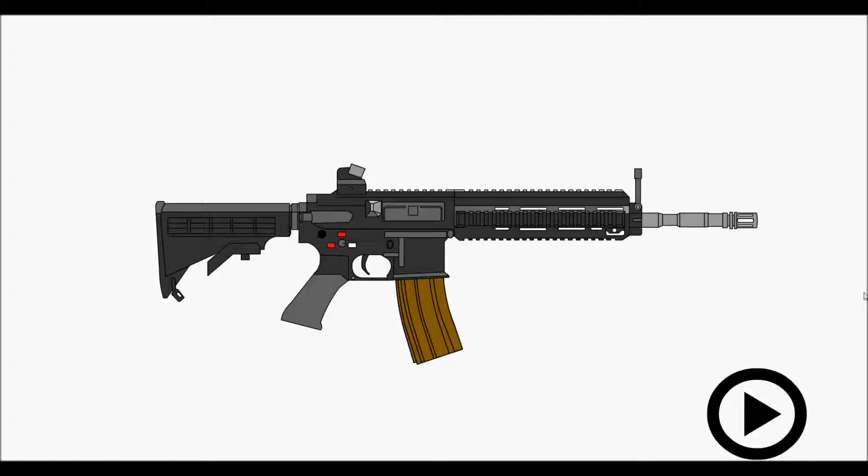It's more stable, and I'll tell you why. In the beginning, I'll use this GBB to demonstrate it. The GBB is called the Gas Blowback Airsoft Rifle.

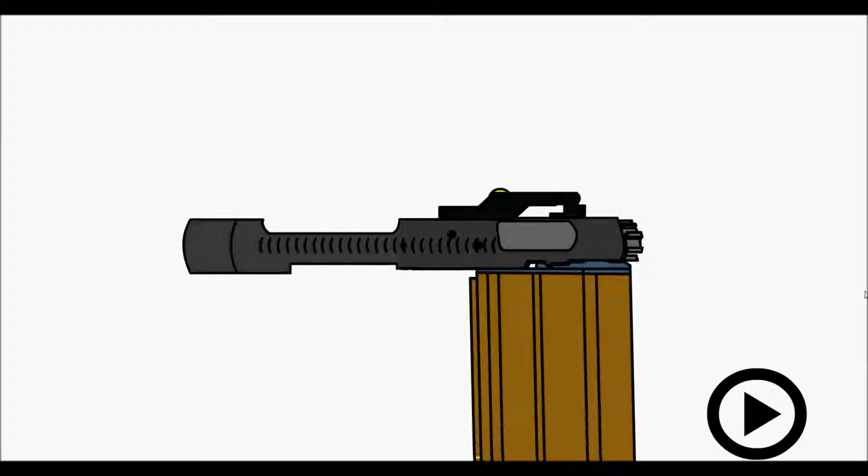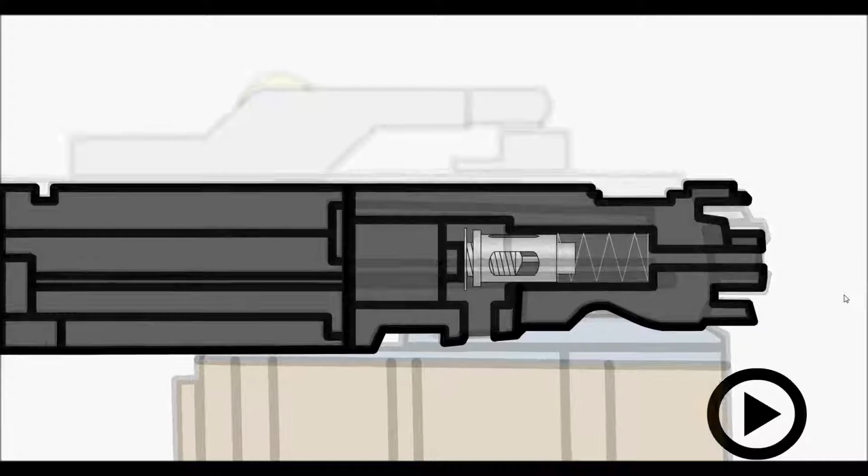It was powered by propane and shoots 6mm BB bullets. We remove the upper receiver and lower receiver and cut the bolt carrier inside the nozzle. You can see the NPAS inside this nozzle, and there are actually three parts inside: the cylinder, the disc, and the spring.

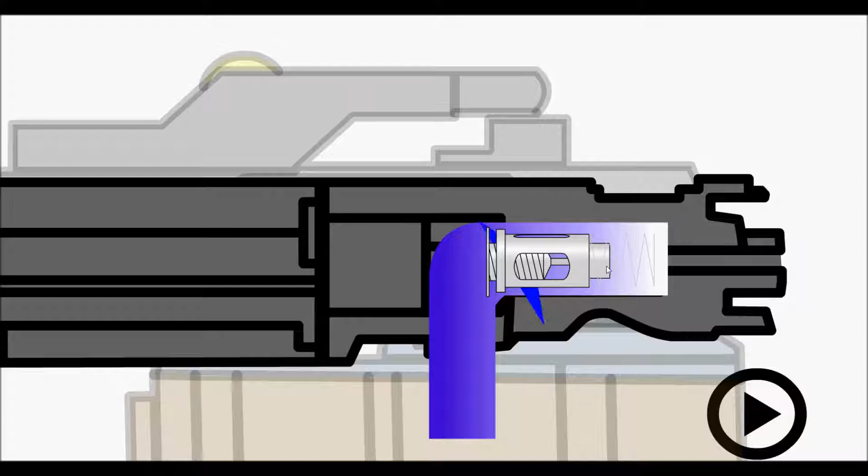When you fire the BB bullet, the gas will come out from the magazine and use it to propel the BB bullet. Meanwhile, it will push the whole cylinder moving forward until the cylinder stops the way, so the gas can't move forward anymore. Instead, it will turn into the other direction and push the whole bolt carrier to the rear.

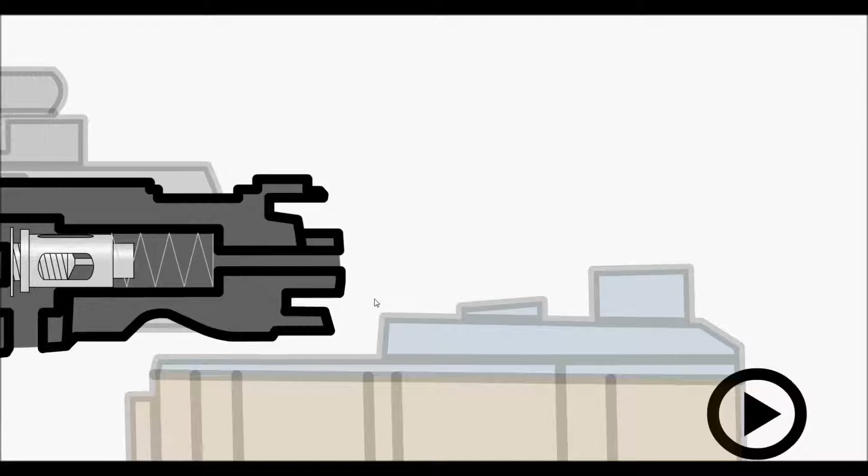Then the bolt carrier will engage with the disconnector inside the lower receiver, so the gas will be stopped. Then it will cock the hammer again and come back, ready to fire the next round. The NPAS is able to change the length, so it can stop the propane earlier and the FPS will drop.

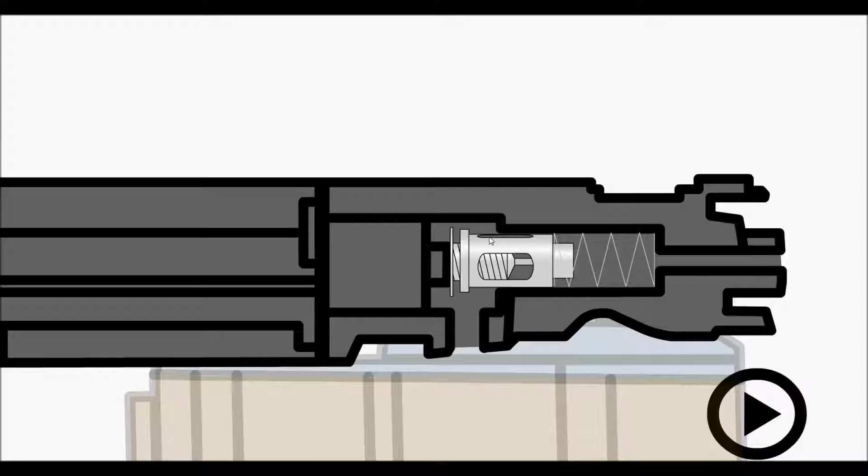But after many years, and from some customers' feedback, we found out that the cylinder will actually change location when they fire a lot of rounds. So the FPS will change.

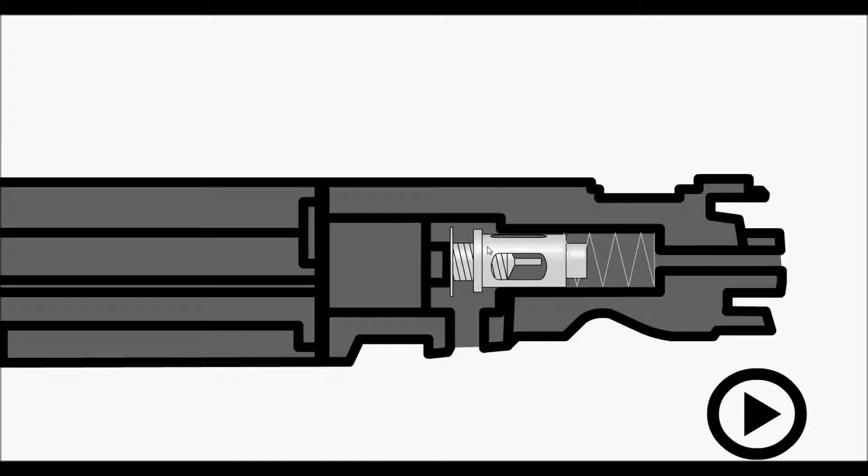We wanted to solve this problem, so we thought a lot and used many ways to find out the reason. The result is we wanted to solve the problem, so we changed the design inside this nozzle, and also used a different way for the nozzle head.

This means if we can make sure the whole internal parts are always in the same location, the FPS will be the same. As for the front end nozzle, if we can restrict or limit it, the FPS will also be more stable. Now I'll tell you how Artec did it.

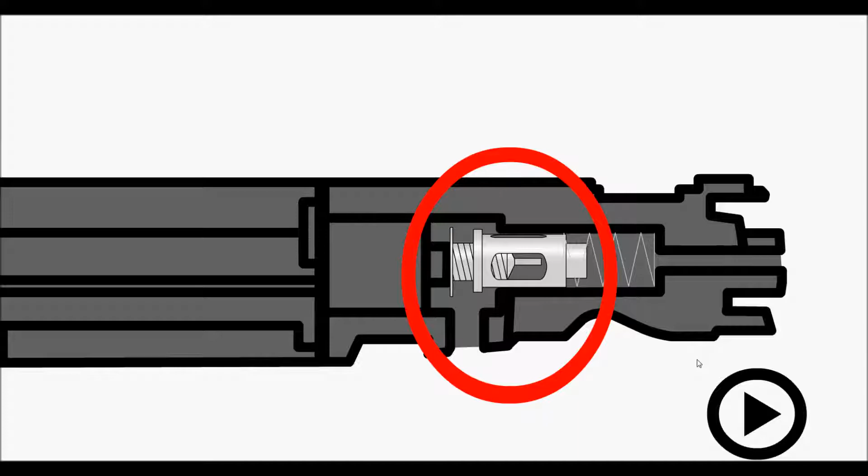We redesigned the whole nozzle and also the rear part. There are screws on this rear part, so we exchanged the disc setting inside the original NPAS, but we use an octagonal column. This column will attach and tighten on the rear part, but is still able to rotate.

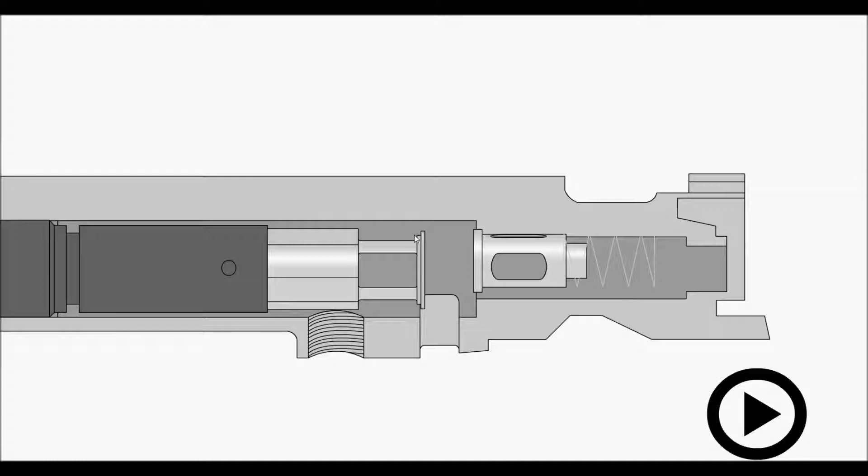The only thing you can change is the position by rotating it. Then we remove the cylinder and insert the disc. This spring will push the whole disc, making sure the disc will always attach onto this column.

When you rotate the disc, it will rotate the column too, so we're still able to change the FPS. And now we also put a magnet inside. The magnet will actually flip up and attach to this column, so it will stop the column from rotating when you fire it.

But there's actually a small space right here, so when you still use the insert tool to rotate the column, the magnet is still able to drop, so you can still change the FPS. That's why we call it magnetic locking.

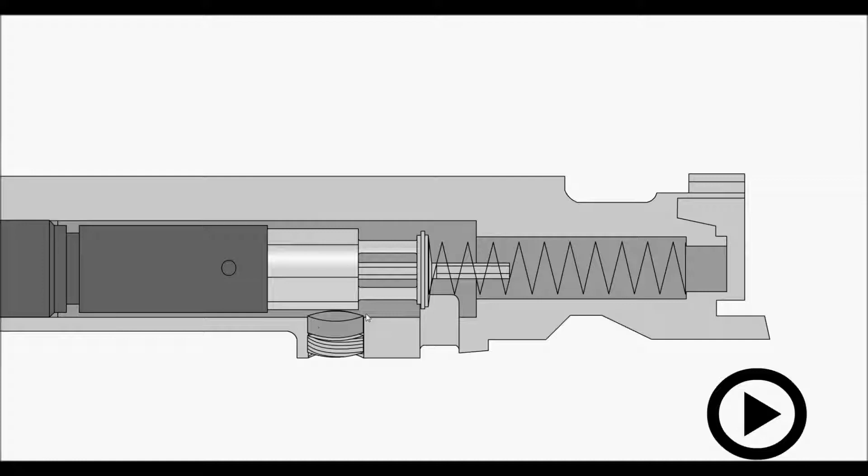Okay, now let's talk about the nozzle head. We redesigned the nozzle head so it can separate and be removed from the nozzle, and there are three different sizes: the red one, the blue one, and the green one. The only big difference is the center hole.

The center hole will be different sizes. The red one will be 4mm, the blue one will be 3mm, and the green one will be 2mm. The only purpose when we want to remove it or change it on our own is because they can restrict the gas, making your FPS more stable.

We will also give you all three nozzle heads, so you can try to find the best setting for you, whatever NPAS setting you change or nozzle head you use.

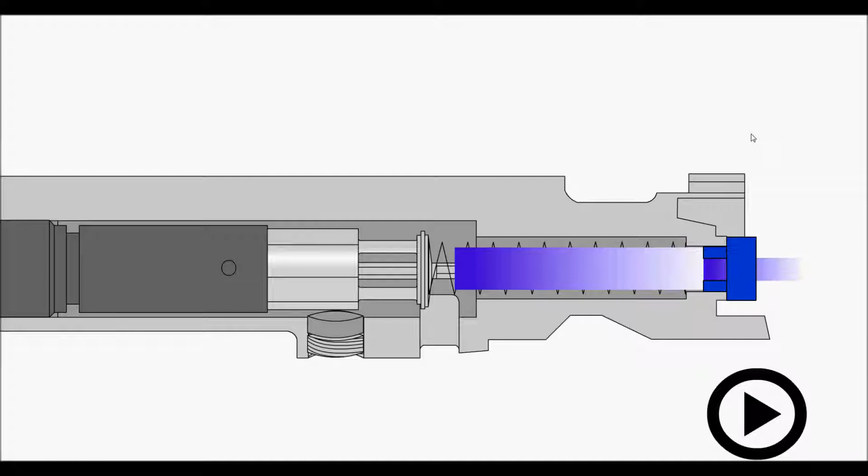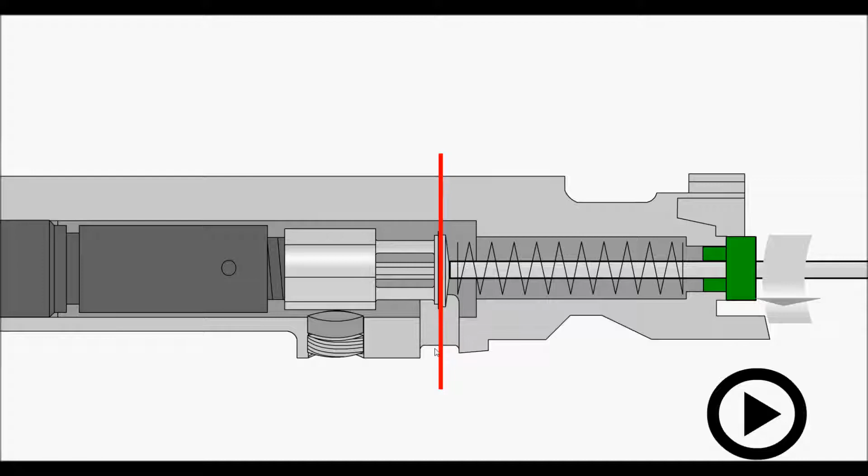We still can use the dedicated tool to rotate the column. When you rotate it counterclockwise, the whole column will move forward, so the FPS will drop. According to our test experience, make sure the whole column will not go over the center line of this gas hole, so the whole system will be more stable.

After the war game, I suggest you remove the nozzle head, so that will turn your GBB into a decoration that will be even more safe.